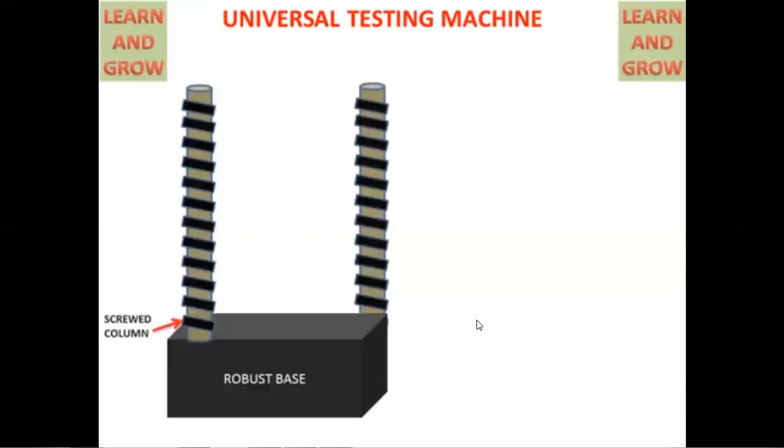Even I think you can... whether this video is audible. Hello. Can anybody of you tell me whether this voice is audible or not? No, sir. No. Okay. I will explain one by one.

Now, in this case, as we are going to see this universal testing machine, first of all, we are going to have one base, robust base, on which there are two screws which are connected, and two supporting columns are there, straight columns. And later on, one lower plate is connected. We can connect this lower plate to these guiding columns as well as to the screws. Okay, the screws can rotate, and the upper plate.

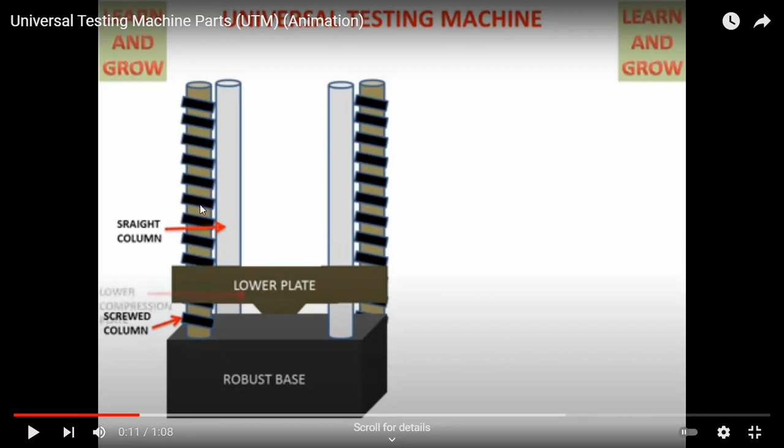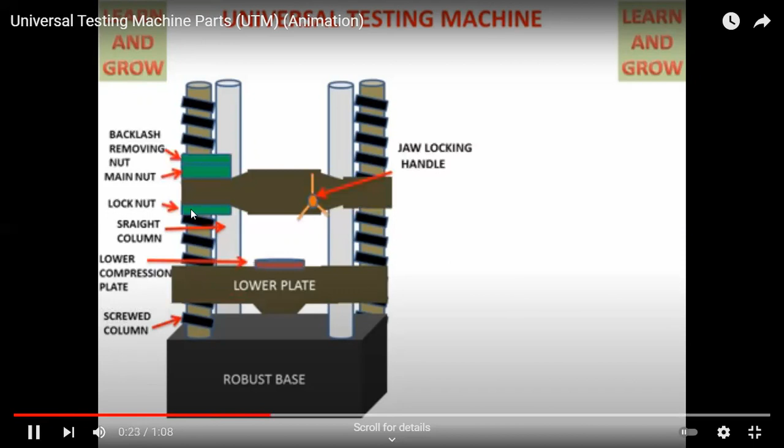Now this upper plate, you can see here the upper jaw, which is connected by means of lock nuts. These are the two top plates. Okay, and as the screw is going to rotate, the jaws can move up and down. And this up and down motion of jaws is calibrated to the load applied. That is, you can apply tensile load while the jaws are moving in upward direction, or you can apply compressive load when the jaws are moving in downward direction.

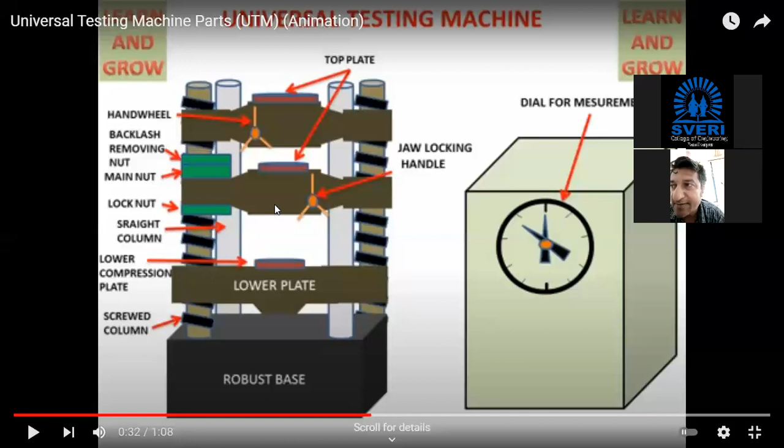Okay, this is another unit in which the scale is fitted so that as you increase the load, that is tensile load or compressive load, these two needles of this machine, one is the fixed needle, and second one is calibrated to the applied load. These needles are moving in clockwise direction with simultaneous motion. But the needle which is calibrated to the load, when the specimen is going to get cut, will suddenly come to zero, but the second needle will remain at its position. Okay.

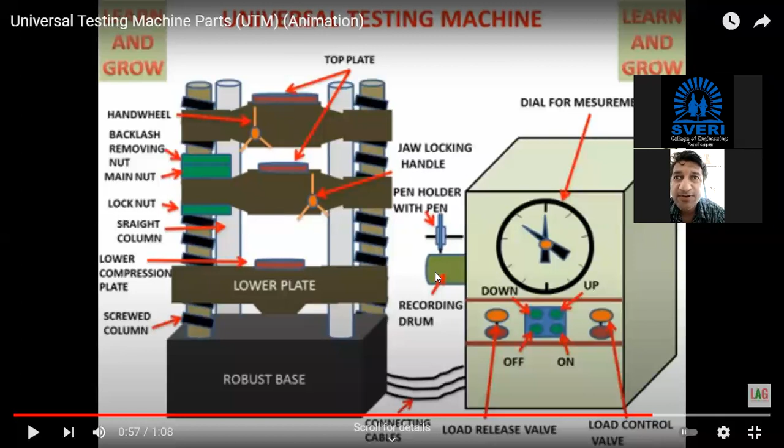We have on and off or pause button, up and down button for the jaws. In emergency, you can release the load if required. You can control the value by means of other buttons, and this unit is connected to this machine, and one more pen holder is provided so that the rotating drum can note down how much load or how many revolutions are taking place while these jaws are moving in upward or downward direction, and it can be recorded.

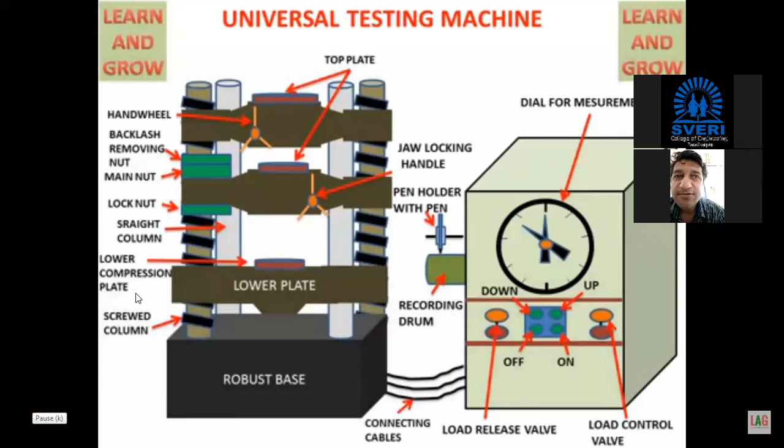This is how the universal testing machine looks like. Okay, so actually one more video is there from which we can get all the information related to the universal testing machine. I am showing all these things because you have not actually conducted any experiment. See, as we have talked about this robust base, this lower jaw, and this upper jaw, and these are the two needles.

This red one you can see can rotate with this black one. Black one is calibrated to the load. Here is the drum on which you can have the recordings. With the handle, you can operate the jaws of this upper and lower arm so that we can fit the specimen inside it.

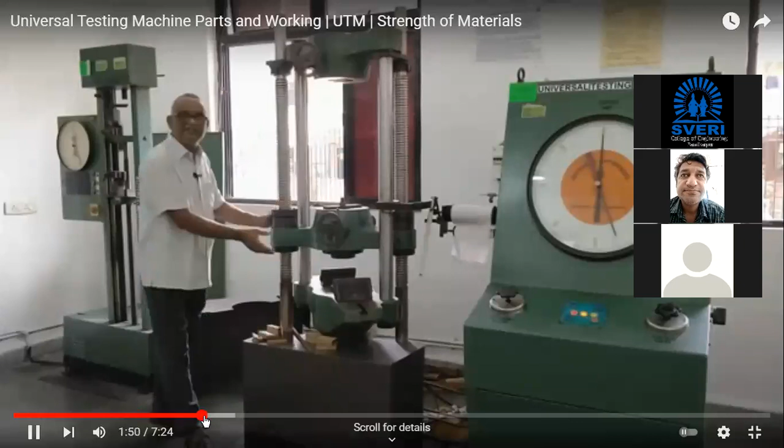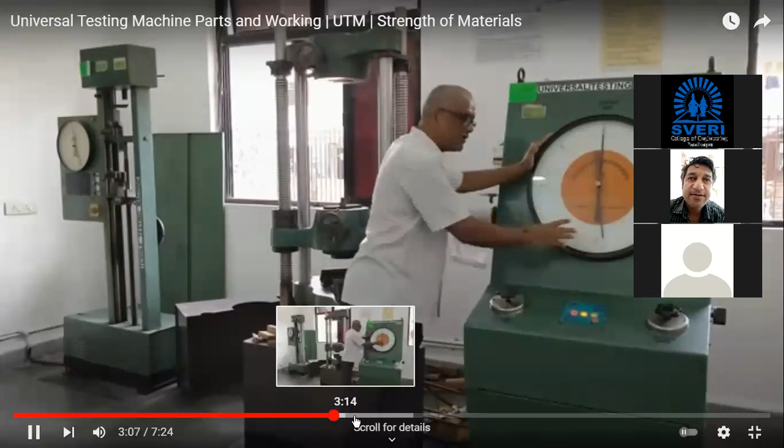These are the two vertical screws, and these are two vertical guiding columns. Here we are going to have the control panel: on, off, or upward and downward motion of the jaws. See, this red needle can be rotated from the outside of the dial, along with the black needle which is calibrated. How it operates, that we'll see.

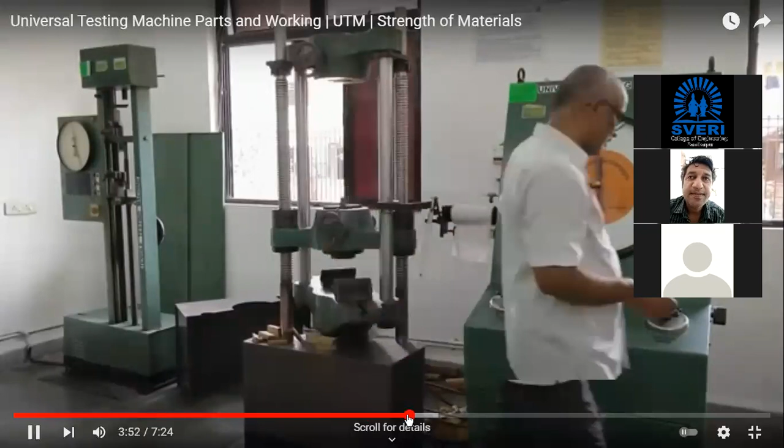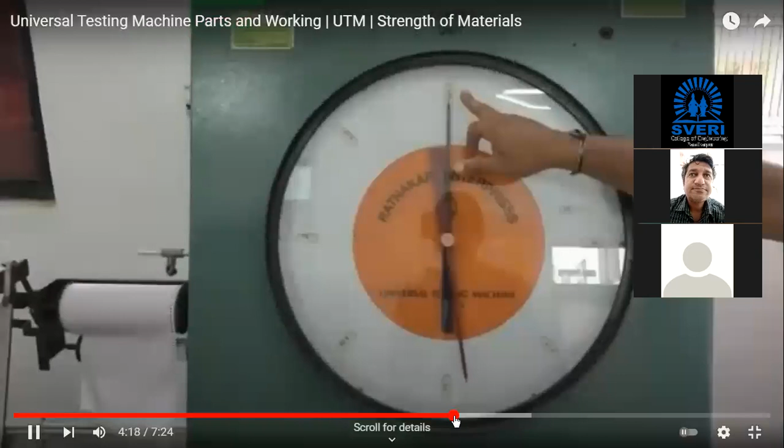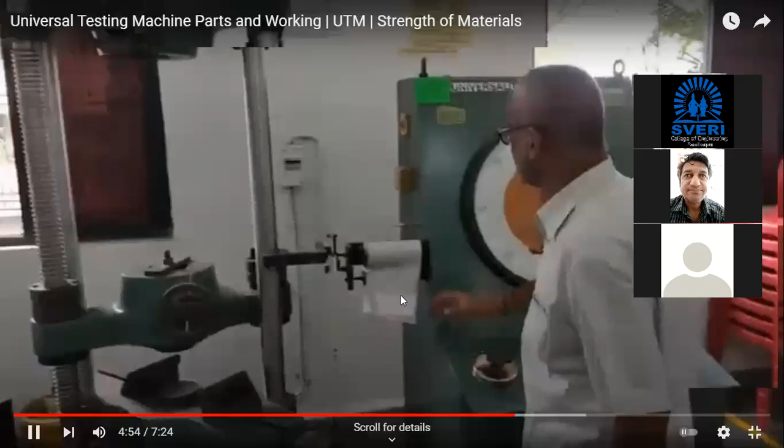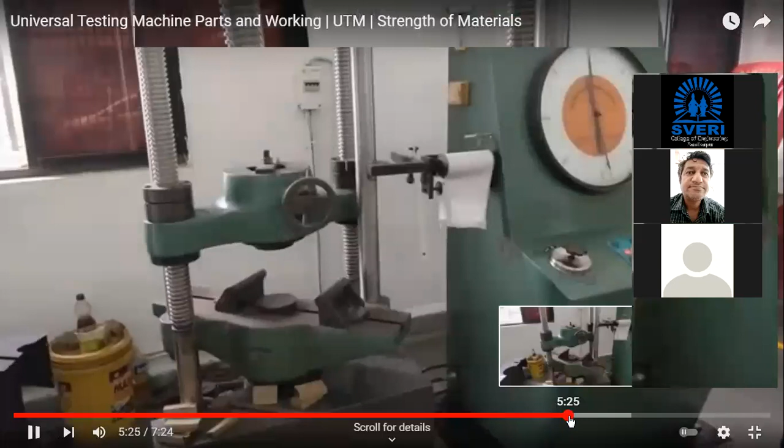Now the machine has started. This dial is calibrated to the load. You can change the unit of that dial. See, the screws are rotating and the jaws are moving up and down. It has stopped now.

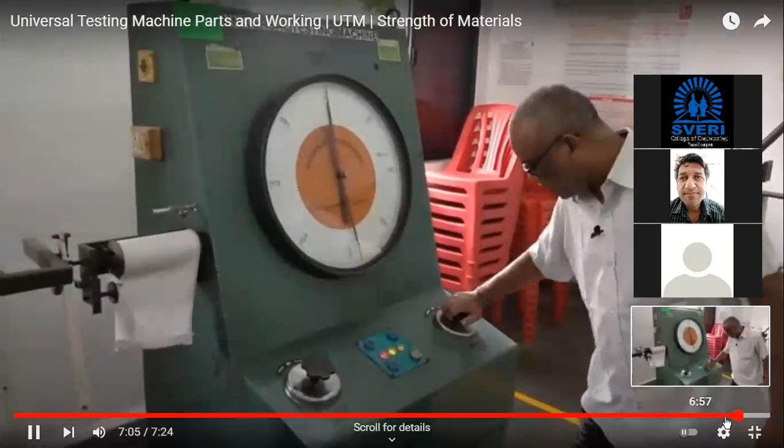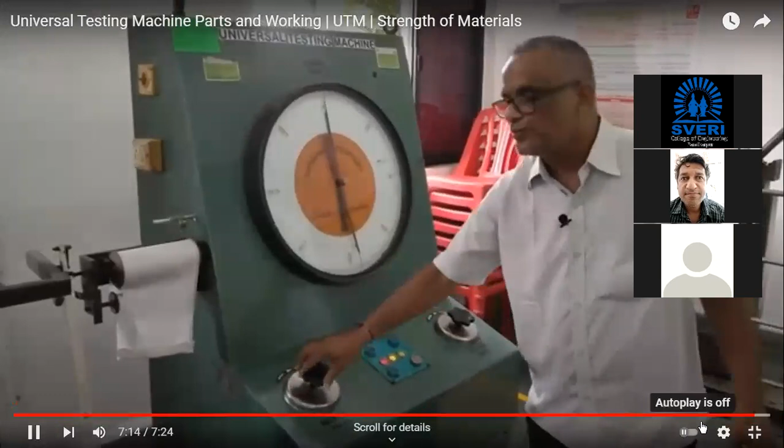Okay, we have seen how this machine operates and how the testing can be done. Now actually we are going to shift to the virtual lab. Here I have already come to the link of this virtual lab. You can search on Google also: tensile test on mild steel. You can put it in Google and you will directly get this link.

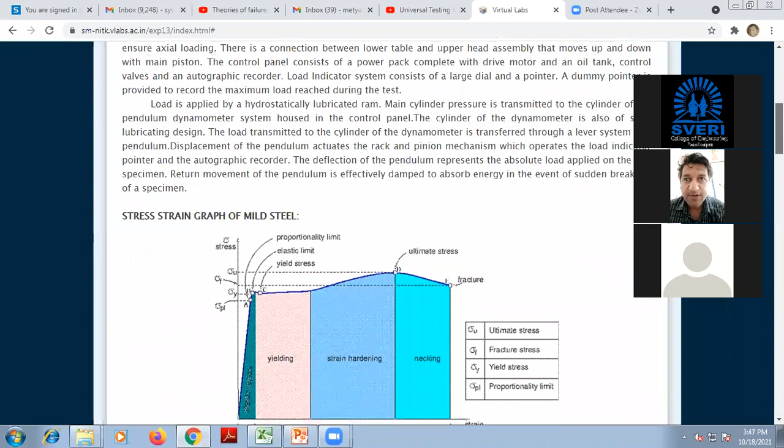Okay. Now before going to this experimentation, we know, as we have discussed in the morning's lecture, what is the theory behind it, how we are going to conduct the test and for what purpose we are going to conduct the test.

For drawing this stress strain curve for any material, we are going to conduct a test on the universal testing machine. Here you can see this test is particularly conducted for mild steel. In case of mild steel, let me know first of all whether it is a ductile material or... Ductile, yeah, okay. It is a ductile material. For this ductile material, we will have a separate point as a yield stress. We will have a separate point as an ultimate tensile stress.

Okay. We can have these 4 different regions. In the morning, we have seen broadly 2 only, that is, one is elastic and the second one is plastic region. In this case, here we can see the first region is called the elastic limit or elastic region. The material will behave in this region as an elastic material. Later on, yielding starts. This graph has become somewhat flat. It is called the yielding region.

Later on, this total is plastic behavior of the material. In this plastic region, we have seen only elastic and plastic, but in plastic, some part is devoted to the yielding. Then the graph increases and strain hardening is done. That is where strain is increased very fast as compared to the stress, but in the plastic region only. Later on, necking is formed and ultimately this material gets failed.

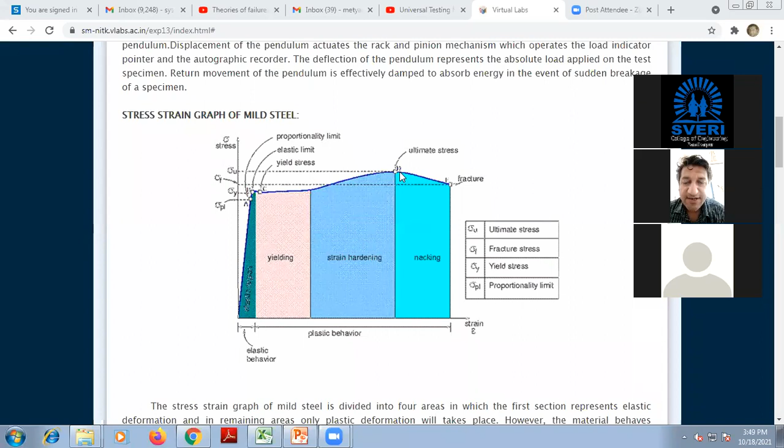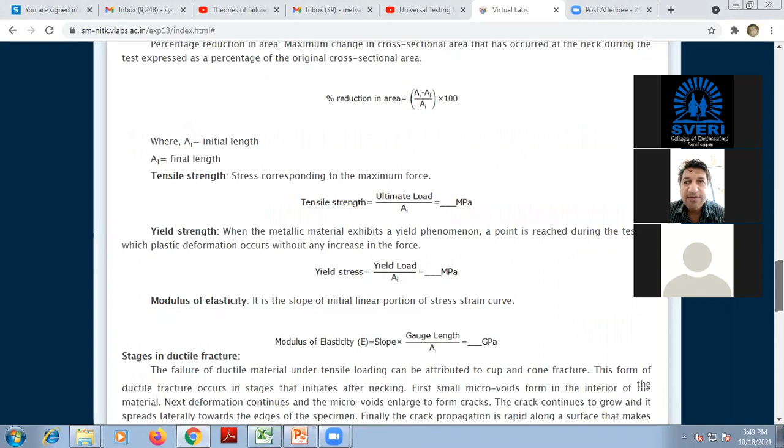So all the theoretical background has been given, that is, what neck forming is, what the elastic limit is and what plasticity means. All this is given in this theoretical part. Now here you can observe how the material gets failed. First of all, you can see this first diagram. When you are going to apply tensile load, what is going to happen here? The neck is formed, and after formation of this neck, fracture takes place inside the material.

That means the atomic bonds get released and some tiny areas are generated where the 2 atoms are not in contact with each other. This tiny area is converted into a bigger fracture or crack, which grows inside the material, and later on the maximum shear stress is generated, and at 45 degrees you can see the shear planes occur, and finally the failure takes place, not fracture. Here you can say fracture, but here the failure takes place, and this cup type of shape is formed here.

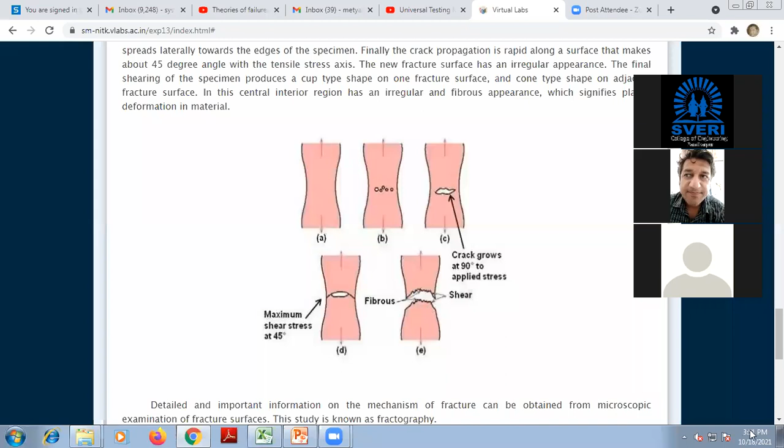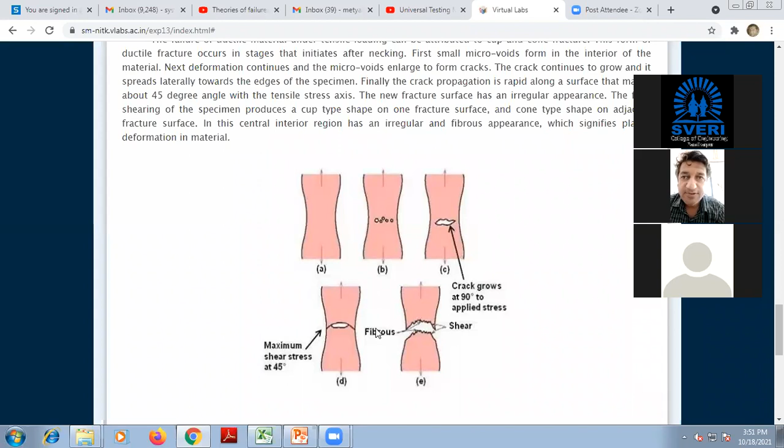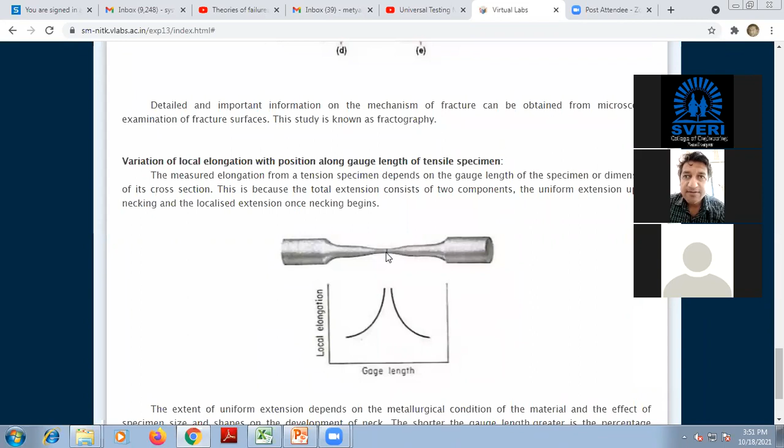This is what we can say is the mechanism of failure in a normal tensile test. It has explained here how actually the failure is going to take place. This is the actual specimen, where you can see how the neck has formed and the final failure has taken place. After this, we'll see the procedure. I'll explain while we are going to do this experiment. Then evaluation, you can do your self evaluation. We are mostly concentrating on this simulator.

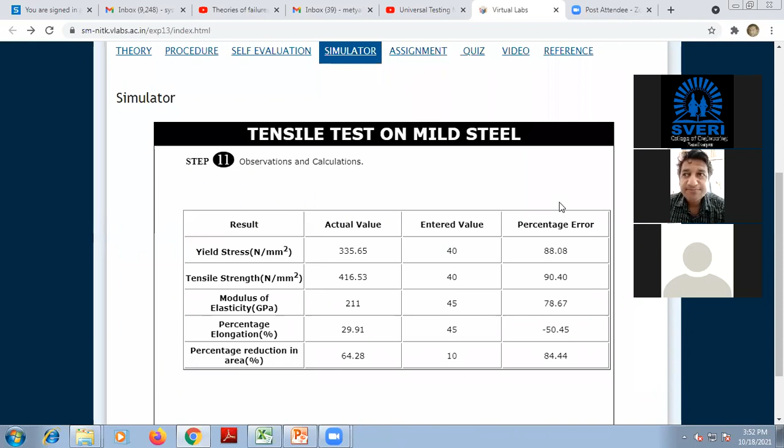Now here you can see, as I have already conducted this experiment, that's why it is showing final results only. Once again, I'll load this test. Here we'll directly go to the simulator.

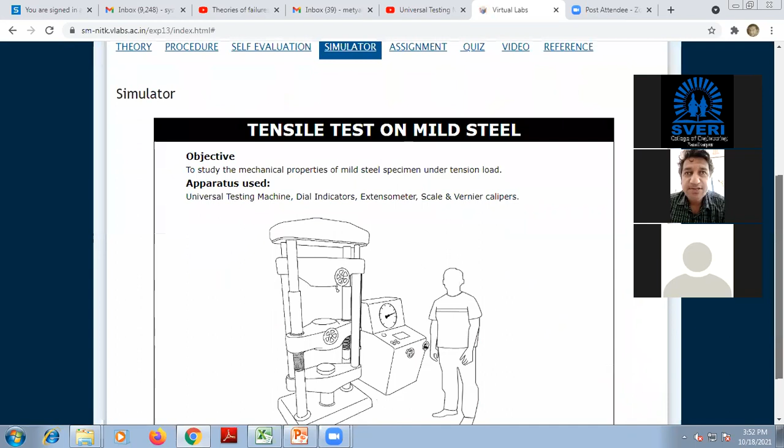Now in this simulation, you can see here one person is standing beside the universal testing machine. The universal testing machine, as we have seen just now, contains two supporting columns and two screws which are rotated by means of a motor. This motion is given to the jaws. It will move up and down, and hence we can apply tensile or compressive load.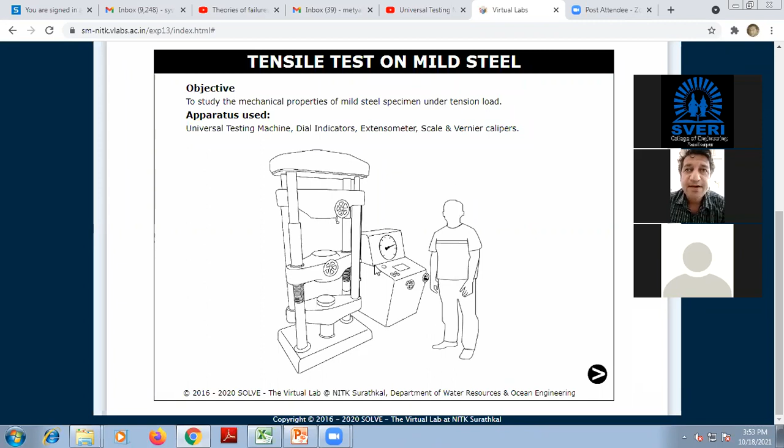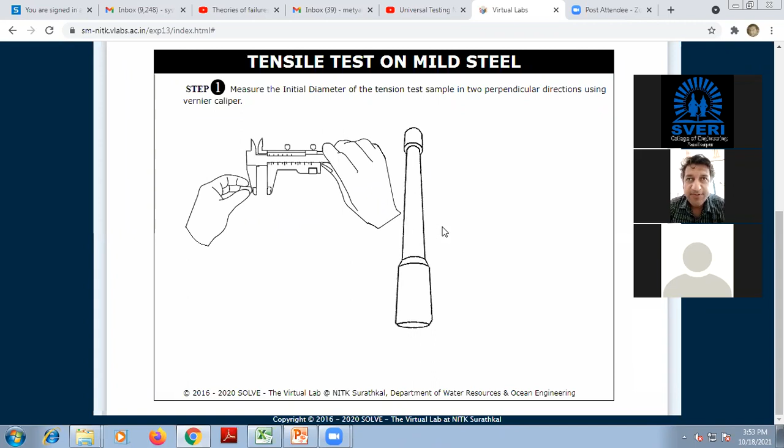Now, before all these things, we have to generate one specimen. It is a standard specimen for which we are going to conduct the test. So first of all, we have to take dimensions with the vernier caliper. So the diameter is 12.55 millimeter. From the other side also we have to measure the diameter. It is also 12.55 millimeter. We observe that the average diameter of this rod which we are going to test is 12.55 millimeter.

Then we have to measure length. You can see here the standard specimen has a length equal to 190 millimeter between the holders. The rest of the part we are going to fit inside the jaws of the UTM.

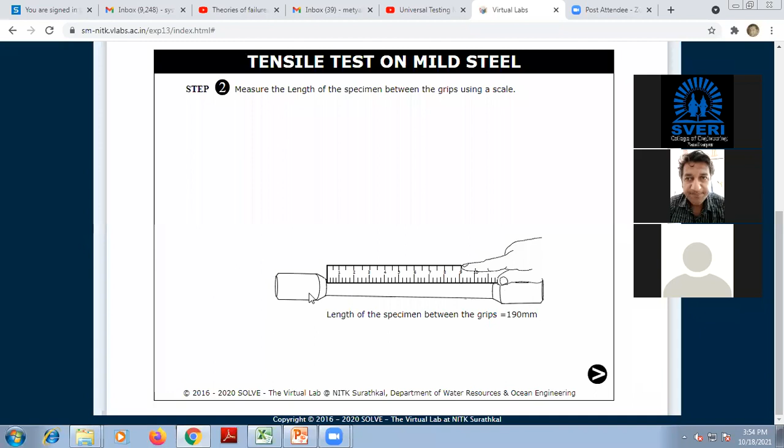Next, what we have to do is punch on this rod at a distance equal to 2.5 times the D. As the diameter is 12.55, you multiply it with 2.5. On that distance, you have to punch points so that one can observe what will happen to those points. A first point has been punched. The second point will be at a distance equal to 2.5 times the diameter.

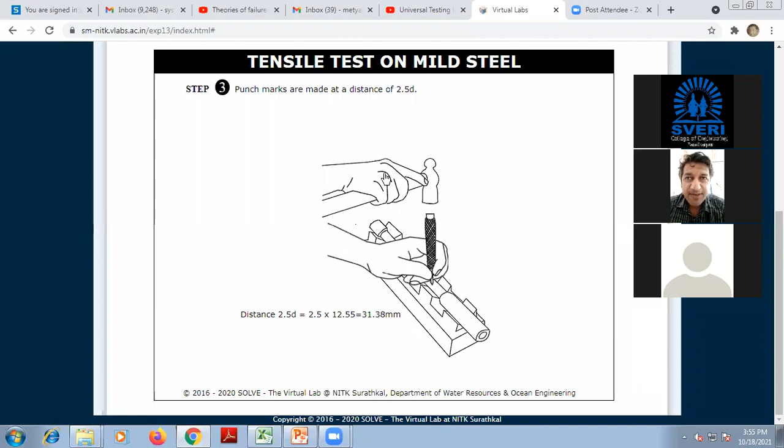Third point, go on clicking on that hammer. You can feel that you are punching on that specimen. So we have 1, 2, 3, 4, 5 punches on that diameter. Okay, we are not going to make a bigger hole or impression on that specimen. That can be observed. It is very teeny, very small, which we can observe.

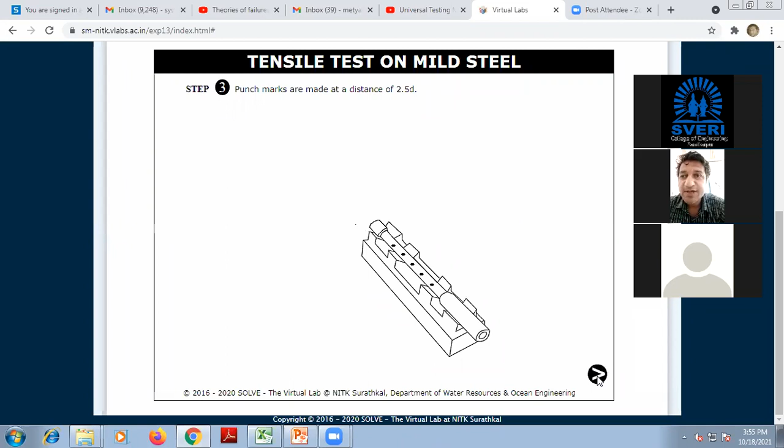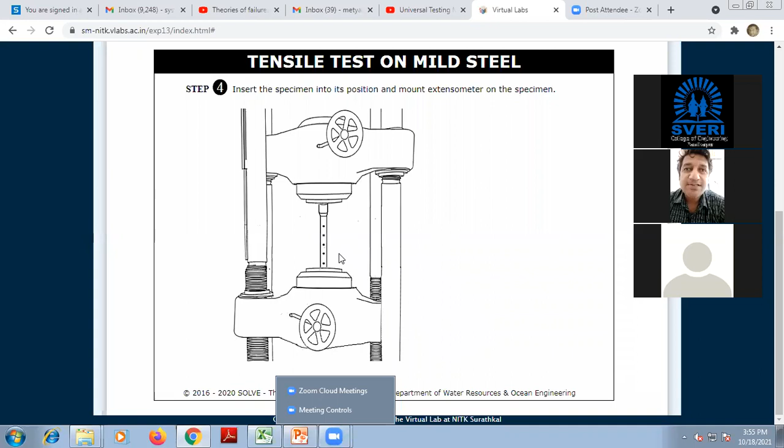After that, we have to adjust this jaw in such a way that we can fit this specimen inside these jaws. Here I have faced a problem that it is not placed. Yeah. Now we have placed it. Then rotate this jaw in such a way that we will find the required distance, that is 190 millimeter only.

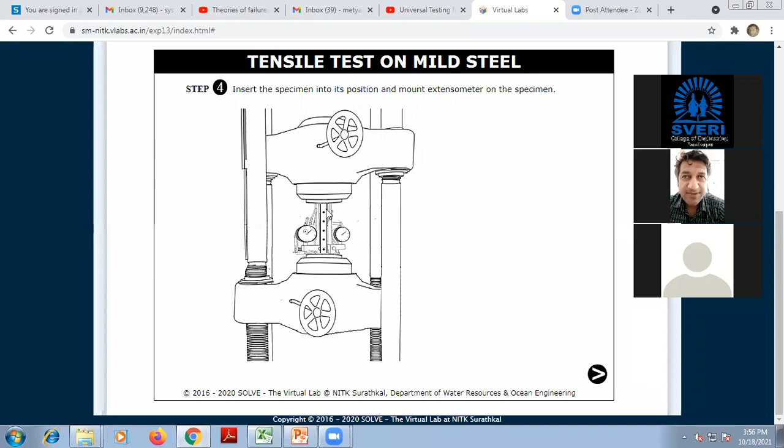We are going to put two different dial gauges so that one can measure the elongation which can take place between these punch marks, sorry, punches, not holes. So we can set this dial gauge at 0, and this second dial gauge at 0. The least count of this dial gauge is 0.01 millimeter. It can measure the length changing by 0.01 millimeter also.

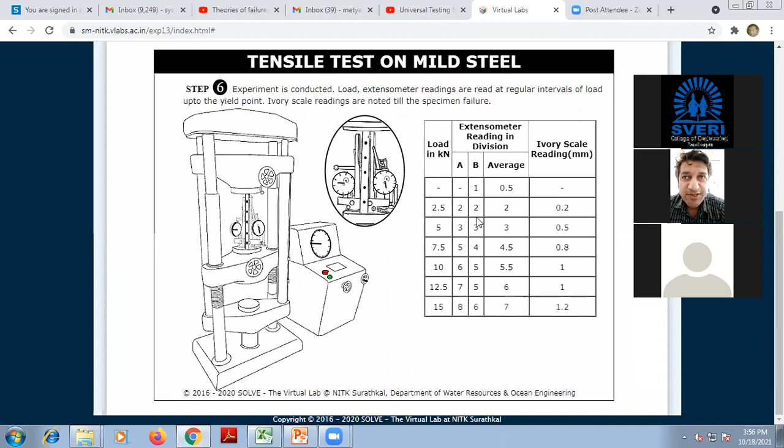Then we have to start by pressing this green button. We are gradually going to apply the load. You can see here, these dial gauges are moving, okay, and gradually load is applied. Here the neck has formed. Once this neck forms, this diameter is getting reduced, length is getting increased, and finally we can stop. We have to press the stop button, and finally what happens? This specimen breaks into two different parts.

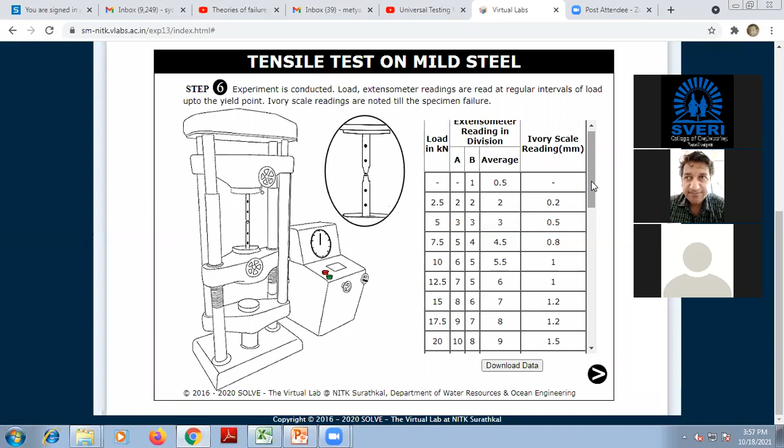This data you can download, which we have conducted. Okay. This is the elongation which has taken place, which was measured with the dial gauge, by application of the load. As you gradually increase the load in kilonewton, first it was 0, then 2.5 kilonewton, 5, 7.5. These are the steps by which we are increasing the load, and the respective elongation we are going to see in the other column.

So once you see it, you can draw this graph. Nowadays, this graph is drawn automatically because computerized UTMs are available. See the previous one, where we have, from the table, load versus deflection which has taken place. From that, we can calculate strain, and later on stress, right? So we can draw this graph of load applied in kilonewton and the dimension change which has taken place.

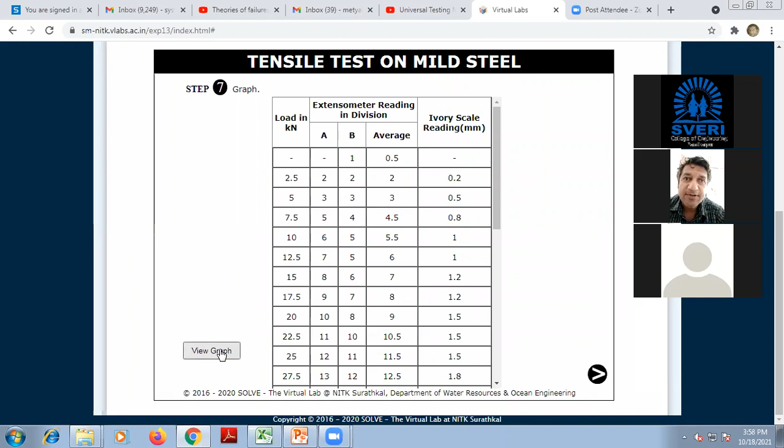You can see this data, okay. From this data only, we have drawn this graph. You can view the graph. At any point, how much load has been applied and what the deflection is can be seen. Next, this is load versus extensometer reading, that is, the extension which has taken place. The slope can be calculated, delta y divided by delta x, that slope can be measured.

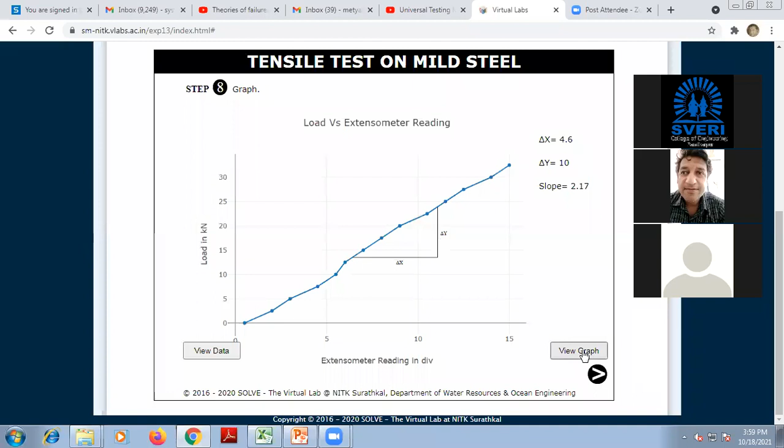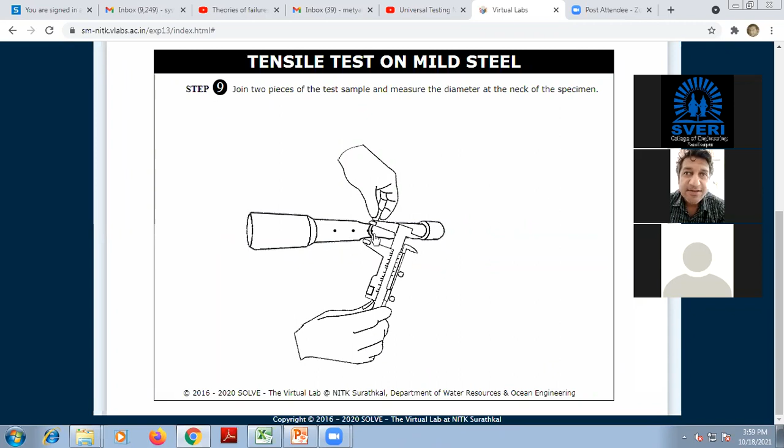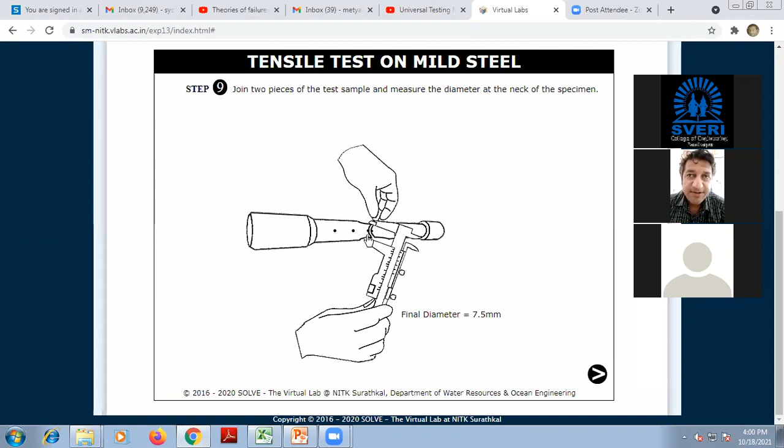And this is how we can see the neck formation has taken place and it has cut. Now you can measure how much the diameter has reduced. This diameter has reduced to 7.5 millimeter. It was initially 12.55 millimeter. So how much reduction has taken place? 5.05 millimeter reduction has taken place in the diameter, and that much elongation has taken place in the specimen. You can check between these 2 points, 82.1 millimeter, the final length between the punch marks.

How much was it initially? 1, 2, 3, 4, 5 punches. 3 punches were there, and the distance was 2.5 times the diameter between the 2 points. So it is 2 times. That's why it is again multiplied by 2, and that was the distance initially. Now it has become 82.1. Can you do the calculation? We'll do the calculation in 1 minute.

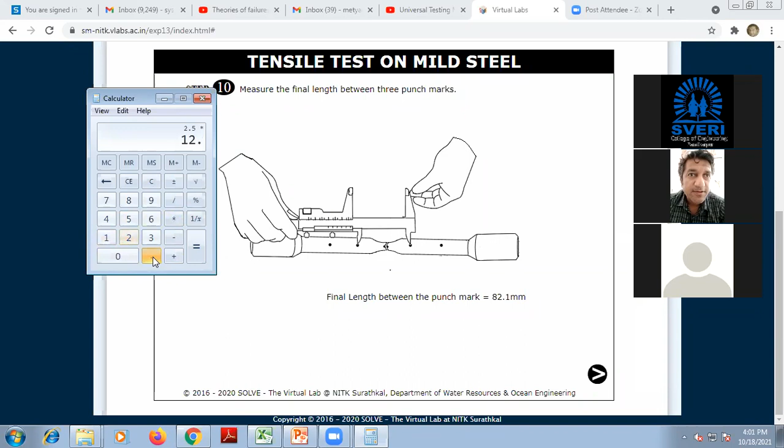How much was it? 2.5 multiplied with the diameter, 2.5 multiplied with 12.55. It was 31.375 millimeter initially, the distance between 2 points. Now again we'll multiply by 2, because these are the regions 1 and 2. I'll take a pen. This is one point, this is the second point, and this is the third point. So we have to measure this distance, this plus this. That's why I multiplied by 2.

So initially it was 62.75 millimeter and it has elongated to 82.1 millimeter. Hence you can calculate the strain: change in length divided by original length. You can calculate strain, right? So 82.1 minus 62.75.

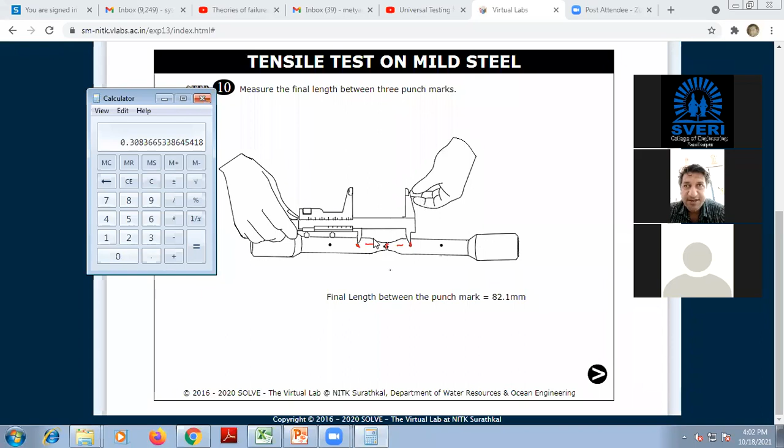82.1 minus 62.75. It has elongated by 19.35 millimeter. Divided by original length 62.75. Strain is 0.308. Okay, you can measure it. So from that, if you multiply with E, you will get the stress, how much stress has generated when the fracture has taken place or that material has broken.

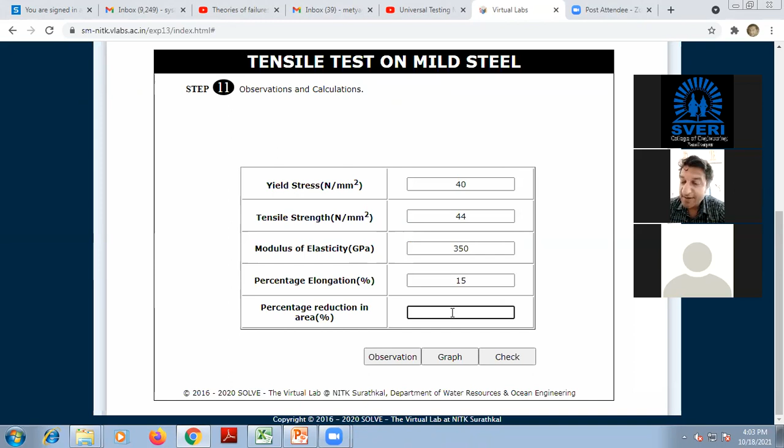Okay. Here you can put those values and directly you can again calculate the graph. For example, I will put here 40, 44, elastic is 350, elongation percentage is allowed for 15, reduction in area can be taken place by 10%. You can see this graph. Okay. So calculations can be done. You can check it. Percentage which has taken place.

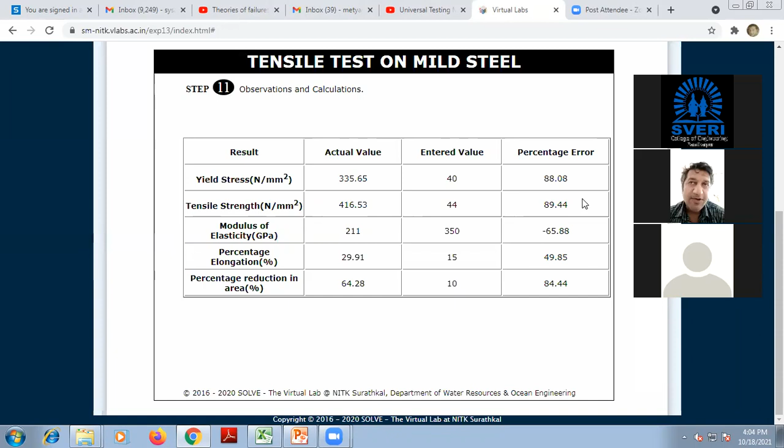Modulus of elasticity. It is given in GPa, gigapascal. I have written it into Newton per mm square. Now this type of experiment can be done. Any doubt related to this? No, sir. How the neck has formed and whatever may be the data which we are getting from this type of test, that data is related to this graph.

So can you tell me which values we can get from the simple tensile test on UTM? Are you getting my question? Which data we can get from simple tensile test on UTM? What value we can get? Principal stress. Principal stress value we are not getting here. You can see this graph and you can check what we are getting actually. Sir, question repeat. What data we are getting from this test? Or which value will come to know from this test?

Ultimate stress. Right, ultimate tensile stress, that value can be calculated if the tensile test is conducted. Ultimate compressive stress also can be, if you are going to do the compression. Then fracture stress, yield stress. Now yield stress and ultimate stress, these are the two important values of the stress that we can get from this test. How do you apply the load, whether it is uniaxial or biaxial? Uniaxial, sir. Uniaxial load we have applied and we are getting the result, right?

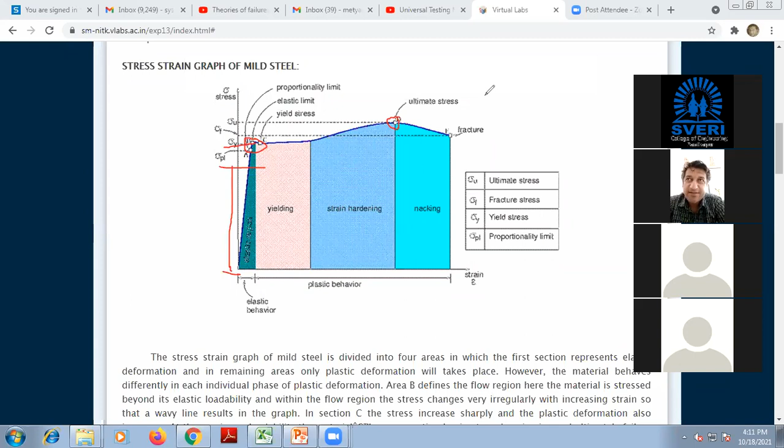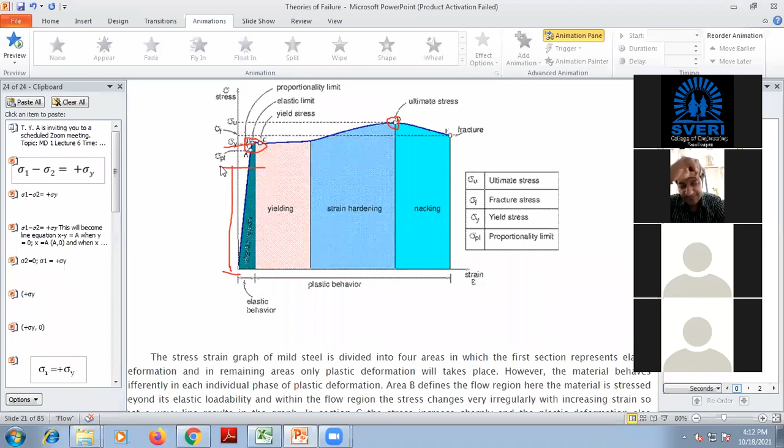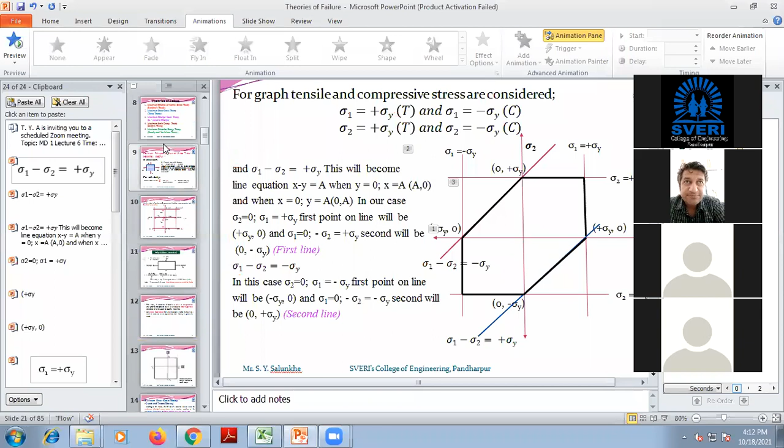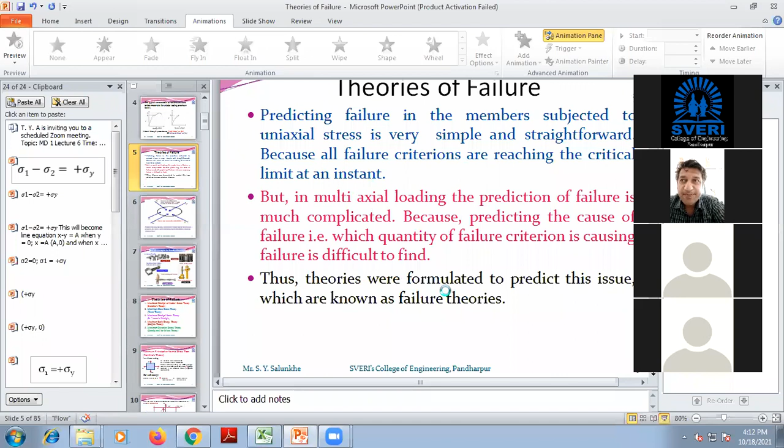Have you understood what is the theories of failure and for what purpose we are going to have these theories of failure? Any question related to that? Hello, you are free to ask. If you are not understood it, you are free to ask. Hello, can we move on this slide?

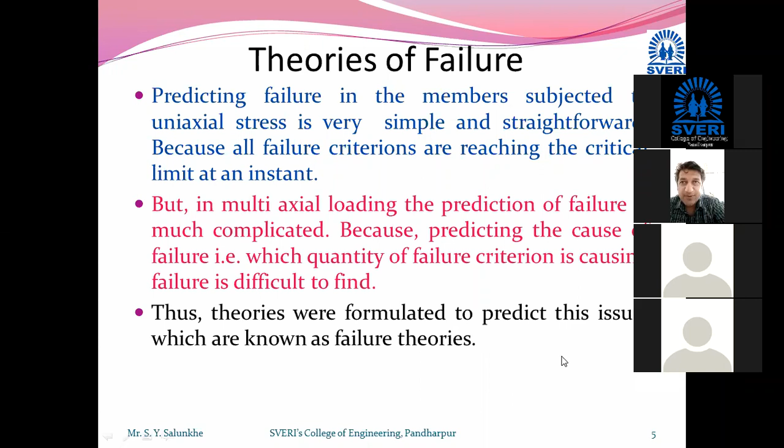Okay, and that is predicted by means of these theories. Thus theories were formulated to predict this issue which is known as theories of failure. Now here you can see that on this region multi loading is done, various loads are coming from different directions. So we can say here the stress which is generated may be at locally, but strength of this material is same everywhere. Somewhere stress may be higher, stress may be lower, but strength, that means its capacity, is same. We are assuming that material is homogeneous and its capacity of sustaining that load is same everywhere.

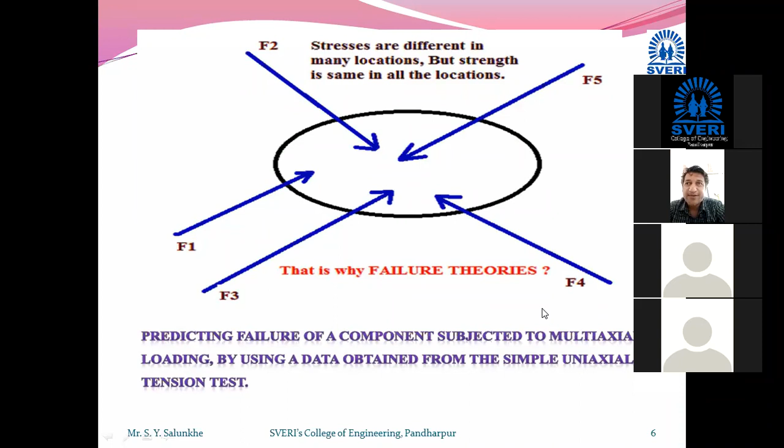Getting me? And to predict that where the stress may get increased, this slide we have seen in morning, these 5 theories are generated. Now these 5 theories, I'll read one by one, are given by various scientists and engineers. And when these theories are getting failed, then next theory has generated.

We'll start from this first theory, that is maximum principal or normal stress theory. This theory is very, very basic theory, which will directly correlate to the test which we have conducted. An example which we have taken for the trolley and tractor. Getting me? But it is not holding good for all type of components. That's why second theory has generated. Whatever may be the drawbacks which are there in first theory, those are overcome in second theory.

But in that case also it has observed that this theory is not holding good. Okay, up to we can say 20% only failure chances are there.

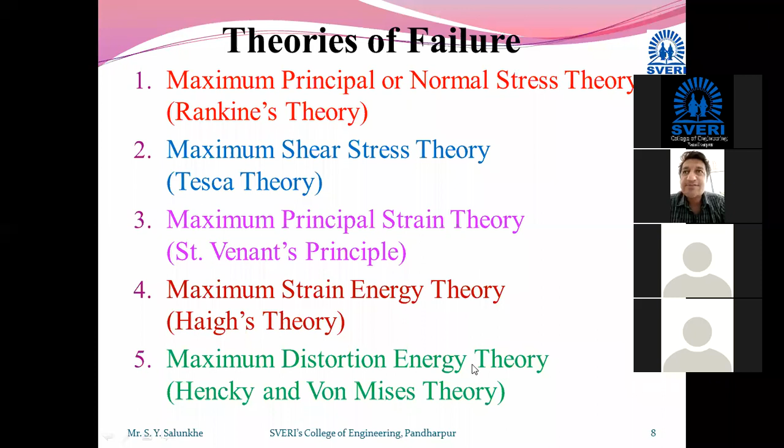Okay, that has developed by two scientists, Hencky and Von Mises. Okay, this Von Mises was Austrian engineer. I'll tell about him later on.

Now here you can see this first theory, that is maximum principal stress theory. Now in case of maximum principal stress theory, we are observing for the 2 dimensions. 3 dimensional will become more complicated, so we are not going to the 3 dimensions. We are observing all these theories in 2 dimensions only.

Now here you can see one specimen on which sigma 1 is the principal stress applied in x direction. Sigma 2 is the second principal stress applied in y direction. This theory says that if either sigma 1 or sigma 2 reaches sigma y in case of ductile materials and sigma u in case of brittle materials, failure will take place.

Okay, it is very simple. Just now we have seen in the universal testing machine that when ultimate tensile stress occurs, the specimen is broken into two pieces, or when yield starts, permanent deformation starts. So according to this theory, if sigma 1 or sigma 2 are below the yield stress for ductile material or ultimate stress for brittle material, then this component is safe.